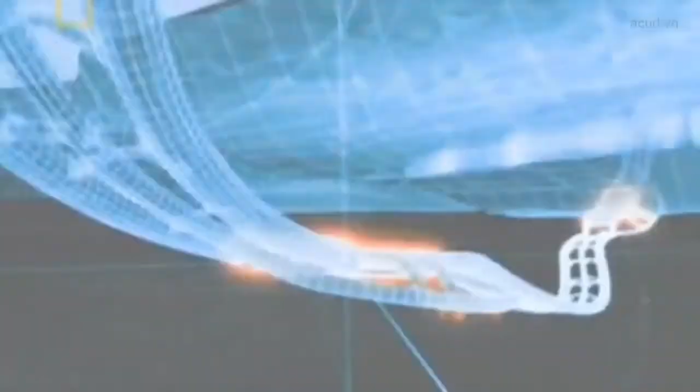Two countries divided by centuries of rivalry and warfare, and by 34 kilometers of treacherous open sea. It was a radical idea to dig a tunnel connecting them 100 meters below the rocky seabed. At stake, billions of pounds and the lives of 8,000 tunnellers. If it worked, it would be the world's longest undersea tunnel.

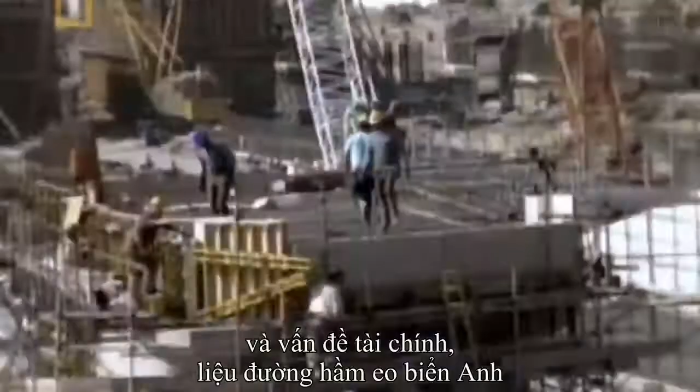But with terrifying floods, a horrific fire, and financial meltdown, the Channel Tunnel would dice with disaster right from the start. This train is making an extraordinary journey that will take it under the surface of the Earth, through one of the world's biggest man-made structures. Engineers call it one of the 7 wonders of the modern world. The Channel Tunnel took 7 years to construct and devoured 1 million tons of concrete, enough to build the Empire State Building 3 times over.

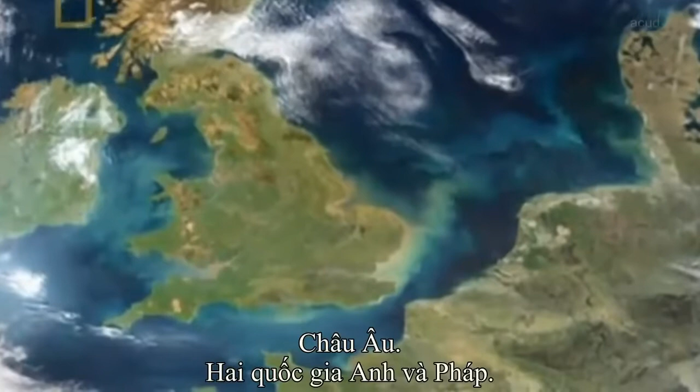Europe, the nations of Britain and France. Since Ice Age glaciers melted 13,000 years ago, they've been separated by this formidable body of water, the English Channel. At 34 kilometers across, it's twice as wide as the Grand Canyon. The two nations spent hundreds of years at war, right up to the last century. For many on both sides, it's still a love-hate relationship. So the idea of an undersea tunnel to link these one-time foes caused controversy. But the massive trade boost for both countries was an irresistible incentive.

In 1986, British Premier Thatcher and French President Mitterrand agreed to build the Channel Tunnel. But the total £3 billion budget was put up entirely by private finance. December 1987. The big dig begins. Heading underground were 2 armies of excavators, each over 4,000 strong, 1 French and 1 British. Each team would dig out from its own shoreline, racing to be the first to the midway point under the channel.

The Brits were a tunnelling elite drawn from major worldwide underground projects. Calling themselves the Tunnel Tigers, they set great store by teamwork. One-man armies don't go very far. You know, it takes quite a few lads to keep something like this going. Commanding them is Chief Engineer Gordon Crichton. You had a team who were totally dedicated to building the job.

The French digging team were the underdogs, locally recruited and trained up for the project. It's the first time any of us have done a job like this. Everyone's proud to be involved. Leading the French troops was Laurent Leblanc. I couldn't believe I was actually working on such an exciting and colossal project. For me, it was absolutely incredible.

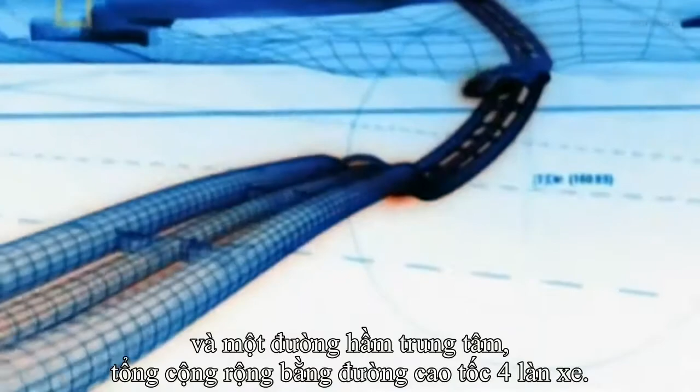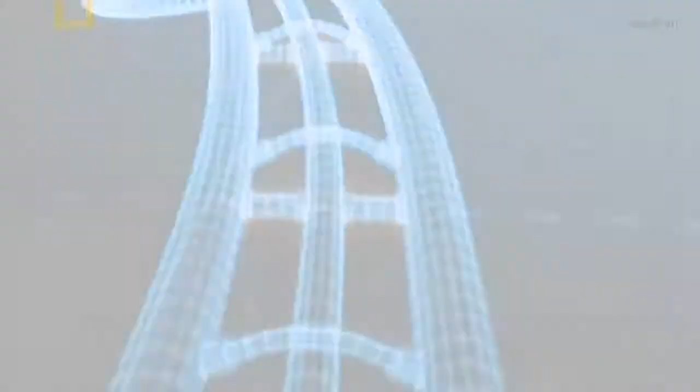The Channel Tunnel would run twice as long underwater as any previous tunnel. The task facing the teams was huge. They had to dig 2 main rail tunnels, plus a central service tunnel, together as wide as a 4-lane motorway. 245 cross passages, crucial escape routes in the nightmare scenario of a fire or accident in the tunnel. Above the tunnels, vents to release the huge air pressure from speeding trains. And giant crossover caverns, allowing trains to divert from one tunnel to the other to allow for maintenance. It all added up to a staggering 153 kilometers of tunnel to be dug.

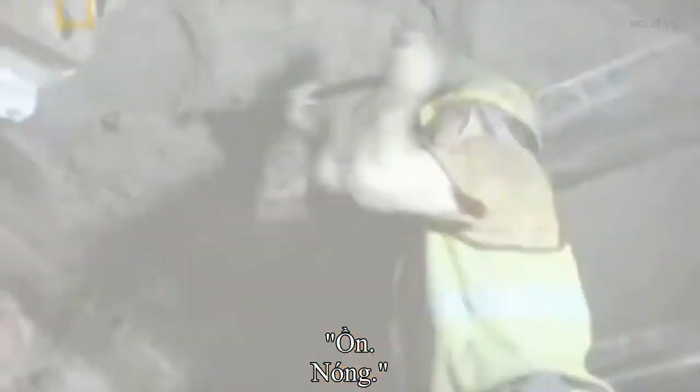As the dig began, the tunnellers were conscious of the vast scale and the real dangers of the task ahead. Above their heads, 100 metres of seawater and rocky seabed. Every day you wonder what you're going into. There's only one way in and one way out. Noisy, hot. You just think, what have I got myself in for, really? Ahead of these tunnelling foot soldiers stood a 17 million-ton wall of earth and rock. It's not a job for claustrophobics. The job would push the men to the limit, but it would also make big demands on the technology of the day.

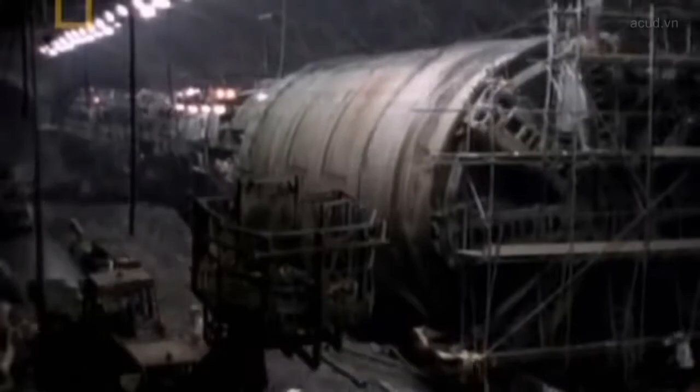Meet the tunnel boring machines. These underground leviathans spearheaded the Channel Tunnel dig. They were 200 metres long. That's the length of 2 football fields. They weighed 1,100 tonnes apiece, as much as a World War II destroyer. And they were twice as wide as a tank. Yet, as Gordon Crichton reveals, the way that TBMs work is surprisingly simple.

Imagine this is the bed of the channel. The machine is rotating underneath the sea, and as it rotates, the spoil from the tunnel is taken out the back, put into railway wagons and carried to the surface for disposal. Also, as it rotates, it erects a lining, a support round it, which is the permanent lining.

Expert tunneller Brendan Riley knew how central the TBMs were to the dig. Basically, the machine is a mini factory. The factory is provided with power, it's provided with water, it's provided with electric. It's a workshop of the machine, preventive repairs. Basically, it's self-contained. It's got everything. 11 French and British TBMs excavated the tunnels 24 hours a day, 7 days a week.

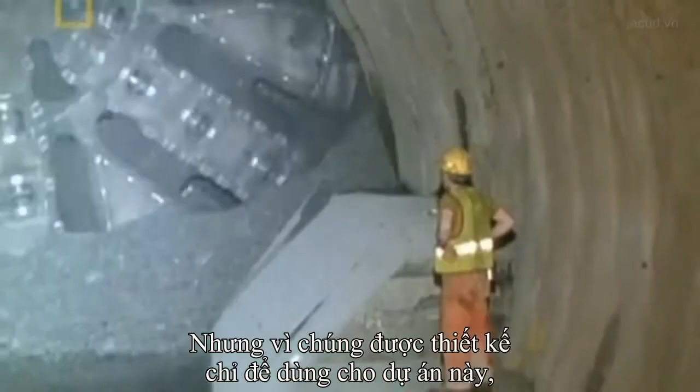The TBM's high-tensile forged steel blades carved out 10 tons of rock with every turn. The biggest machines cost £10 million each, but as they've been specially designed for this one job, at the end they would simply be scrapped.

The race between French and British tunnellers would be won or lost by their TBM's rate of progress. The Brits had the fastest machines, devouring up to 75 metres and 36,000 tonnes of rock a day. The French machines were 25% slower, but did have a key advantage. Their cutting heads were protected by a waterproof housing that allowed them to work on safely, even through waterlogged soil.

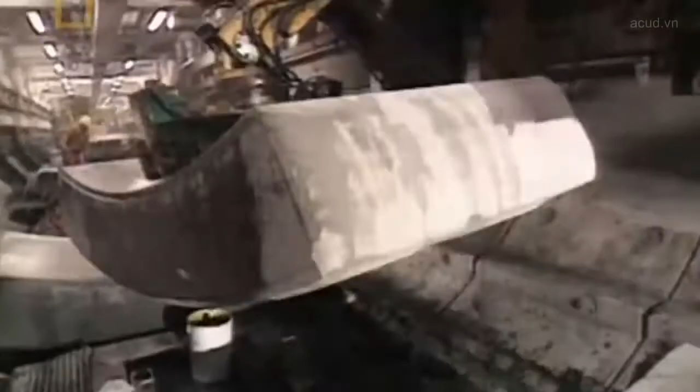1 month into the tunnel dig, with the ground staying dry, the speedier British TBMs began to get ahead. Every day, hundreds of concrete slabs were shipped in to line the tunnel roof as it was dug. They were as big as a family car and 3 times as heavy.

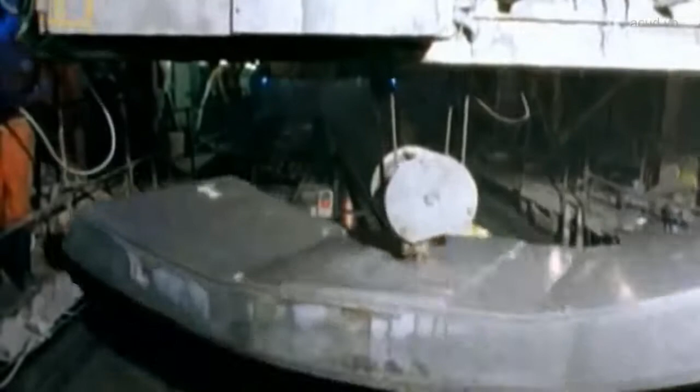This is no ordinary concrete. Specially made to a recipe using granite, it's stronger than the stuff they use to build nuclear reactors. The TBM's powerful hydraulic arms pushed the slabs into place, forming the tunnel wall.

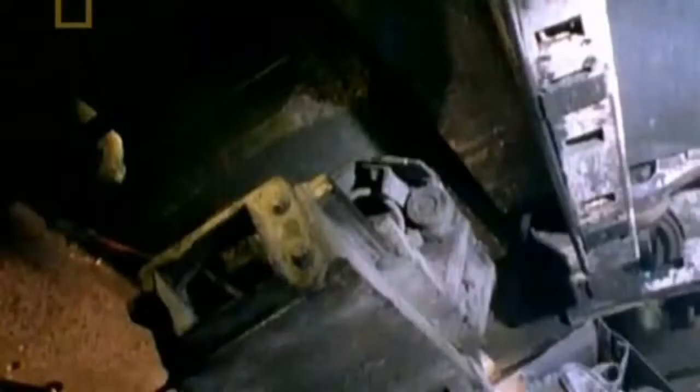The TBMs had to be kept supplied with slabs and constantly moving forward. British Chief Engineer Crichton knew that the schedule was tight. And with the tunnel's £1.3 billion budget all put up by private finance, government bailout was not an option. With the dig costing £1 million a day, each hour's overrun would add £40,000.

By January 1988, the Anglo-French tunnelling race was hotting up. But the Brits were holding on to their lead. The rivalry underground is keeping the dig on schedule, but speed isn't everything. Success relies on keeping both tunnels precisely on target. If they stray off course, lives could be at risk.

It's enough to daunt the boldest of engineers. The Channel Tunnel Project, the longest undersea tunnel in the world. Two rival teams of French and British workers were each digging out from their own shoreline. The plan, to meet midway under the English Channel.

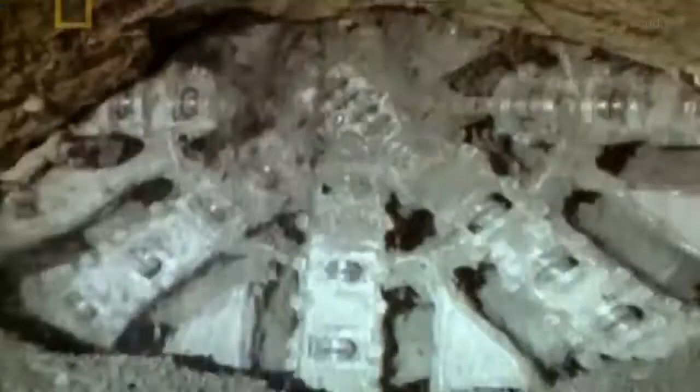The tunnellers' goal was to win the race for the midpoint. But what kept the engineers awake at night was much more fundamental. The fear that the two tunnels wouldn't meet up. If the two tunnels missed each other, that would mean last-minute course corrections, which could create sharp bends. And the high-speed trains that would use the tunnel had to have a broadly straight course to operate safely.

The margin for error was frighteningly slim. The tunnels could not deviate by more than 2.5 meters. Being off target was not an option. But lives were at stake too. If the massive tunnel-boring machines strayed off course, they could hit waterlogged ground. The result could be disastrous. Flooding, or worse, tunnel collapse.

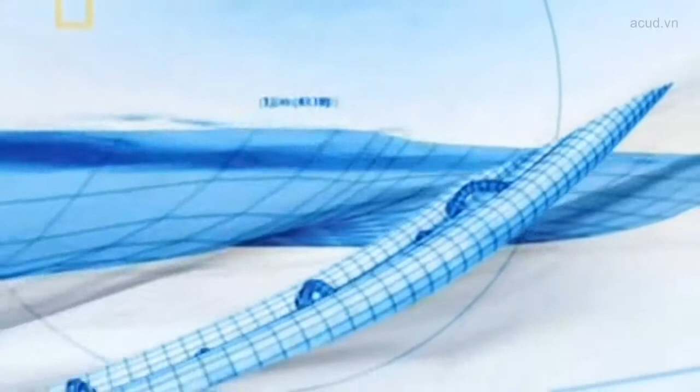It was imperative that the TBMs were guided along a safe and accurate route. That meant conducting one of the world's longest and most in-depth underground surveys. Rewind to August 1986, 18 months before tunnelling began.

When surveyor Ewart Gladstone took on the job of plotting the tunnel's course, he knew the scale of the challenge he faced. France you can see over there, that's the French coast. So we had all that way to drive the tunnel and keep it online for that 38 kilometres. Actually, from here it doesn't look too bad, but it's a long, long way.

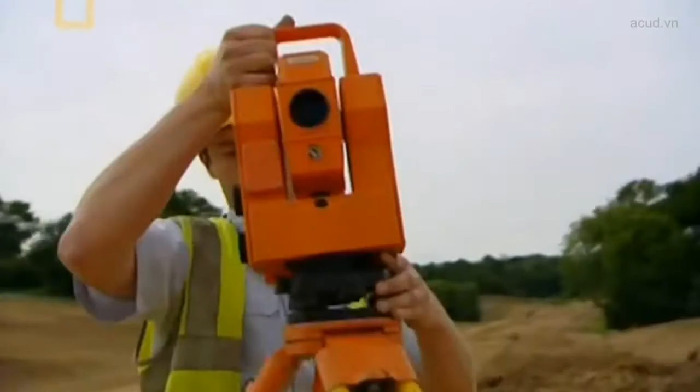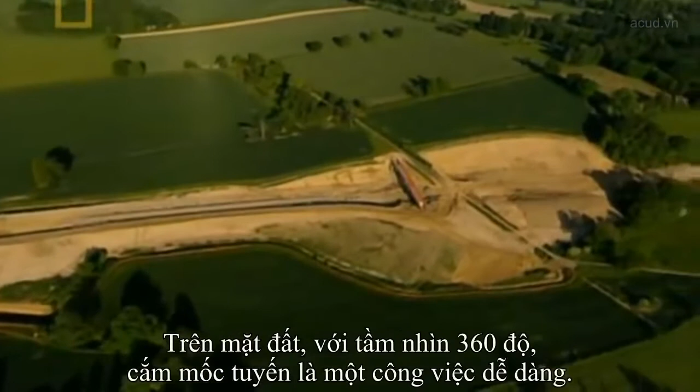Plotting an accurate course over such a long distance underground is a surveyor's nightmare. In tunnels, the normal rules of surveying don't apply. Surveyors normally work by measuring a series of angles at control points along the route. It's all a matter of geometry. Above ground, with 360-degree visibility, plotting a course is relatively simple.

Ewart Gladstone explains the difference. The whole road is opened to the air. All the survey control points from which you do the setting out are already established over the whole length. Underground, there are obvious complications. All the surveyors can see is a wall of rock. They can't see ahead to plot the course.

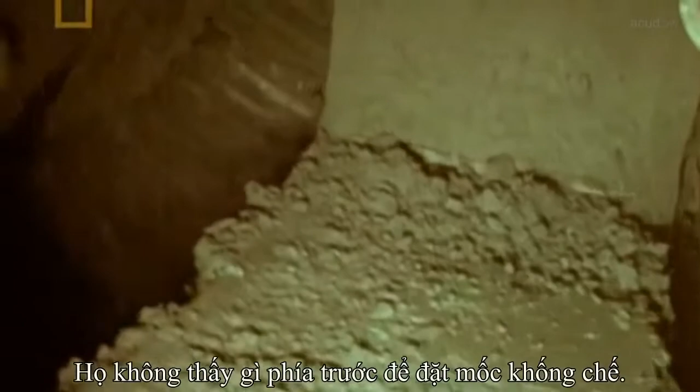Roads have one other plus point over tunnels. Because they're flat strips on the landscape, they can only go off course in two directions. Left or right.

A tunnel occupies a three-dimensional space underground. It can go off course not only left or right, but also up or down. The two halves of the Channel Tunnel had 4 potential ways to miss meeting up. It's like asking a golfer to sink a hole-in-one blindfolded from 38 kilometres.

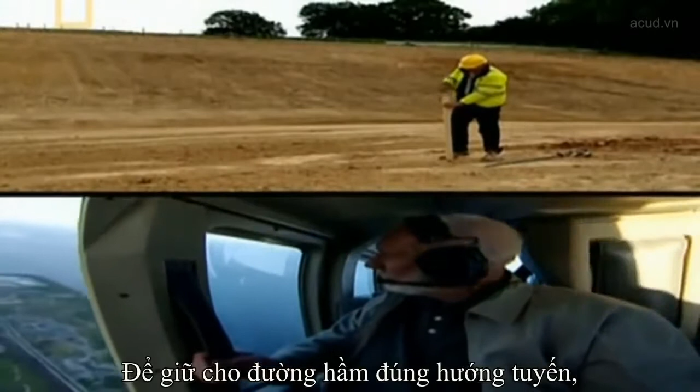To keep the tunnel on course and on target, the surveyors had to use a secret weapon: geology. Along its underground route, the tunnel would be driven through a layer cake of different soil and rock types with very different consistencies. The geologists needed one stratum that went right across the channel. This stratum would provide a trail to help keep the British and the French tunnellers on course. But it must be exactly the right type of rock for tunnelling.

Jean-Luc Desaines was one of the geophysicists charged with tracing the perfect stratum for the tunnel to follow. On the French side of the channel, Desaines began his search. It would have to be waterproof to resist flooding, and compact enough so it wouldn't collapse during the dig.

In these cliffs, Desaines found his prize. Water poured over this seam of rock without soaking in, evidence that it was waterproof. The soft rock, impervious, so no water in the tunnel. This is a perfect situation for boring a tunnel. It's called blue chalk.

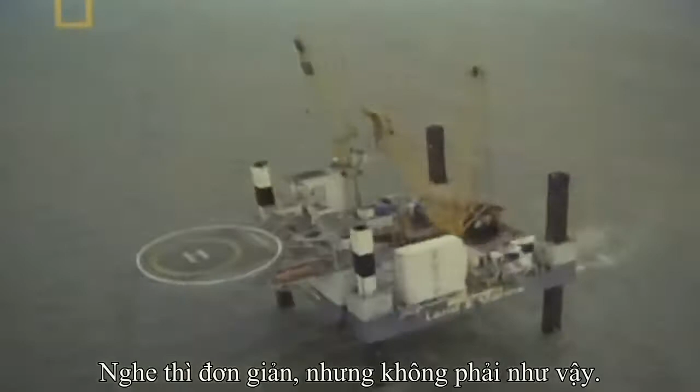But it was one thing to identify the ideal rock, another to discover its course. Geologists drilled a series of boreholes into the seabed and dropped probes that fired sound waves deep underground. The aim, to measure changes of speed in the sound waves as they passed through different rock and soil layers. It sounds straightforward, but it wasn't. Tracing the course of the blue chalk meant sinking 12 of these boreholes right across the channel, a tricky task in one of the world's busiest sea lanes.

You have a high traffic of vessels. You have tide, you have waves, so it's a difficult place for making accurate investigations.

The geologists concluded the blue chalk would provide a feasible route across the channel. If they were wrong and the TBMs left the waterproof strata, they could hit waterlogged ground, with devastating consequences, flooding or even tunnel collapse.

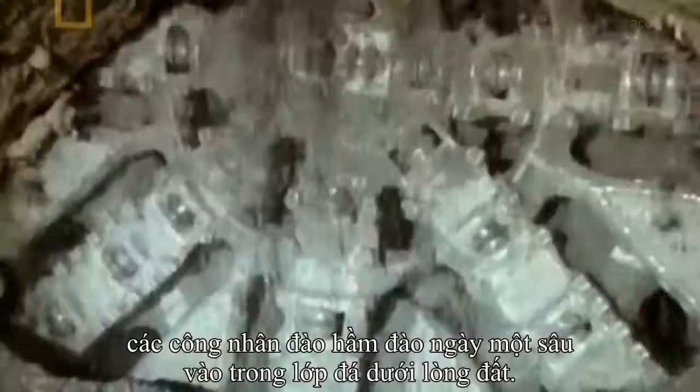Spring 1988, 3 months into the Channel Tunnel dig. The tunnellers were gouging their way through the rock deeper and deeper underground.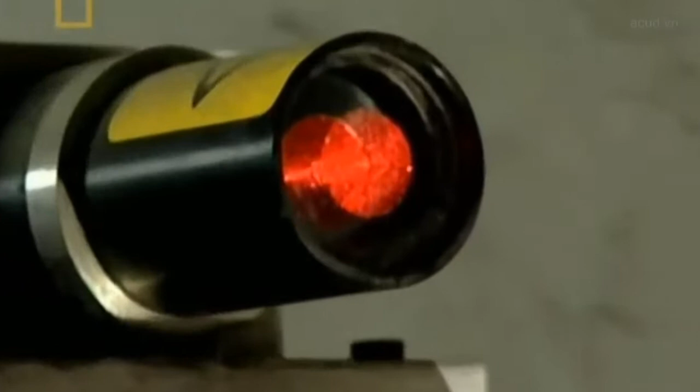Standing between the tunnellers and the risk of flood was the TBM's laser guidance system. Laser guidance is commonly used to keep above-ground structures like roads on course, but underground it had to be used in a more imaginative way. Instead of looking ahead to see where they were going, the tunnellers looked back to where they'd been.

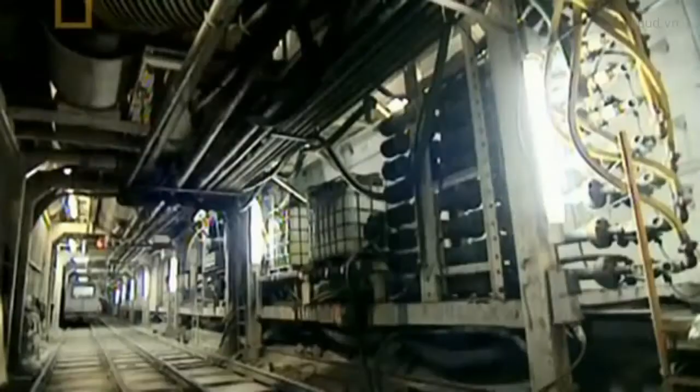Laser beams continually scanned backwards to the tunnel's start point to compare it with the TBM's changing location. Computers then checked this data against the surveyor's course coordinates. For tunneler Brendan Riley, the laser guidance system was one of the TBM's most impressive features.

As the machine moves forward, the laser monitors the change in movement to say whether the machine is moving left or right or up or down. With that information fed back into the computer, it compares that information to where the TBM should be at that known point in time, and gives that information back to the driver to say whether he needs to steer up or steer right.

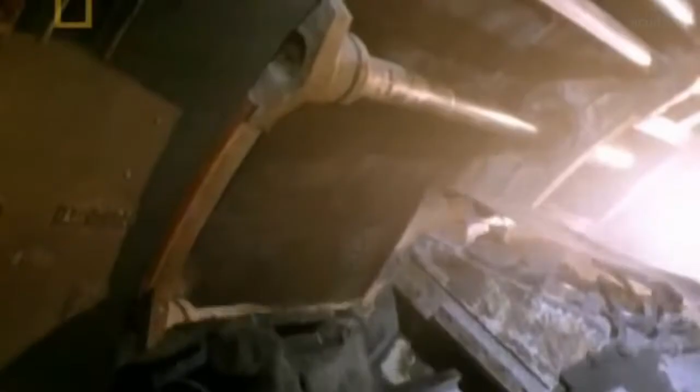As the tunnel face moved further from dry land, conditions for the men got worse. Engineering manager Ian Fugeman recalls the scene.

Anybody going to work had to travel in a cramped train up to 22 kilometres out to the place of work. By the end of the dig, the workers' trains had clocked up enough miles to go to the moon and back 4 times.

This far underground, keeping the air fresh is a major challenge. A massive ventilation system pumped air to the tunnel face. But the men still faced the risk of encountering toxic gases.

The further in you are, the warmer it gets, the less air. We carried respirators with us. If there was an accident, we'd have enough air to breathe with.

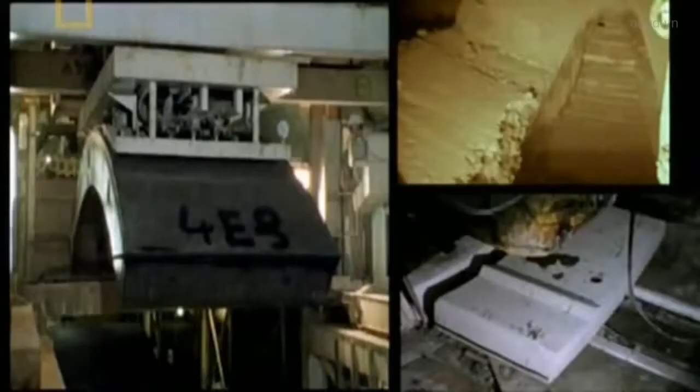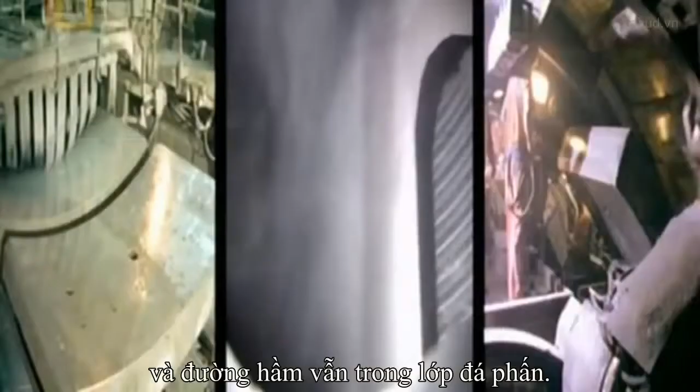But Chief Engineers Gordon Crichton and Laurent Leblanc, the frontline commanders of the tunnel dig, were starting to breathe easier. The schedule was holding up, and so was the layer of blue chalk. But what happened next came without warning.

March 1988, the service tunnel on the British side. Suddenly, what no undersea tunneler ever wants to see: water. Thousands of gallons of it flooding into the tunnel. Work comes to a halt.

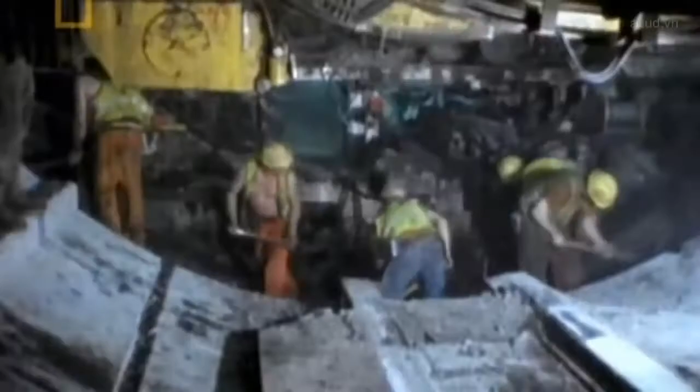Cause for panic. We have to stop straight away because you don't know exactly what you're going into. But Gordon Crichton must act fast to find out where the water is coming from.

Is this just a random pocket of fresh water, or is the sea itself breaking through? He tastes the water, and it's salty. We knew we had a path right to the channel itself. We knew it was serious. It's disastrous news. What's coming into the tunnel is seawater.

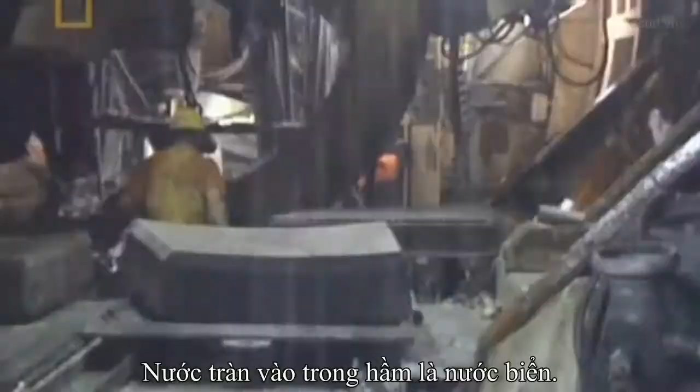The men know that above their heads there's 3,000 billion tons of it. The pressure on the seafloor 50 meters above is enough to crush a car like a beer can. Now, in places, the water starts to burst through with the force of a fire hose, 300 litres a minute.

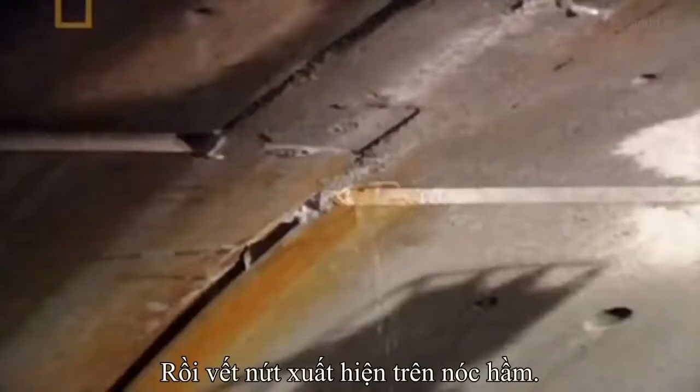Then a crack appears in the tunnel roof. Rocks start to fall. The water is pouring through fissures and loosening lumps of the tunnel roof. The British tunnellers might just be on the edge of disaster. If the cracks worsen, they might let in enough water to weaken the tunnel. Ultimately, it might even lead to the tunnellers' biggest fear: collapse. Chief Engineer Crichton must find a way to plug the leaks, or they could face catastrophe.

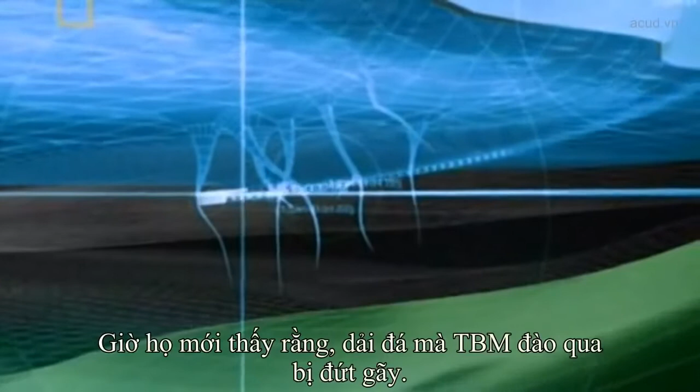But how could this be happening? An 18-month survey identified a special layer of rock called blue chalk that was meant to be waterproof. But geologists are quick to point out that surveys based on sound waves can reveal the course of a rock layer, but they can't give a definitive picture of the rock's quality. Now it turns out that the stratum of rock the tunnel is driving through is fractured, riddled with fault lines and cracks, something the surveyors could not have foreseen.

Back in the British tunnel, Engineer Crichton averts disaster. The men plug the leaks and concrete liners are replaced by stronger cast iron versions. Crisis over for now, the tunnel tigers start to inch forward again. But the fractured ground stretched on, and the atmosphere was edgy.

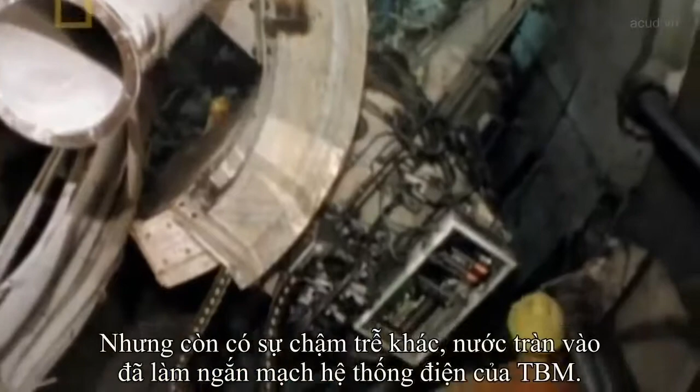Every ring that you cut, you were just hoping that it was going to be good ground that was there. But there were more delays as the leaks short-circuited the TBM's electrics. The clock was ticking. With every day, the costs were mounting, and the overspend was running into tens of millions.

The French side, meanwhile, had also hit water. We did indeed hit water. That made the job more difficult. A lot of water always makes the work harder.

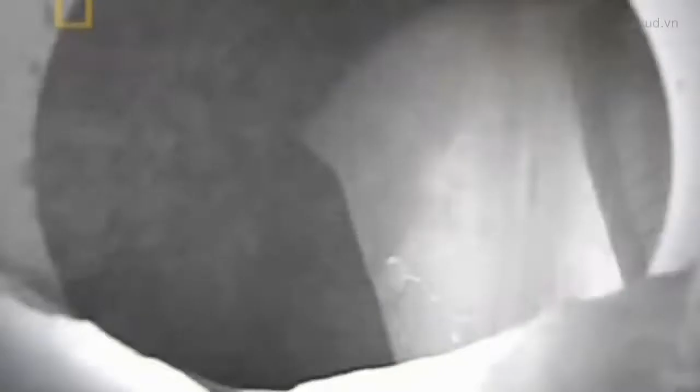But the French had been forewarned about fractured rock on their side. Features in the geology made it much simpler to analyse. Now the French decision to opt for waterproof tunnel boring machines finally started to pay off. Slower than the British TBMs so far, they now gave the French a serious edge. We decided to use tunnel boring machines that were totally enclosed, totally watertight. These could resist any level of water leakage, no matter how severe.

Meanwhile, the Brits slogged through the leaks and falling rocks and prayed for better ground. Workers rigged a form of makeshift armour plating on their TBM and pressed on.

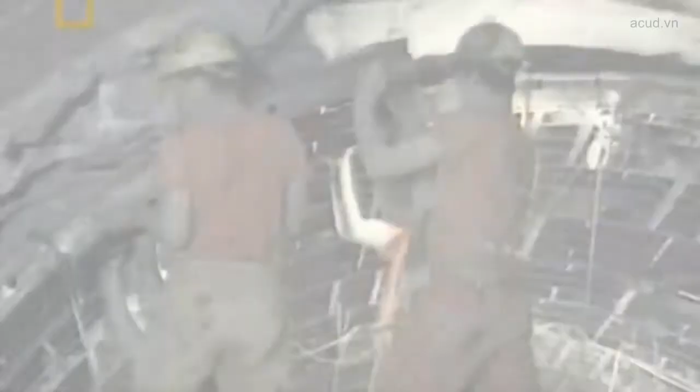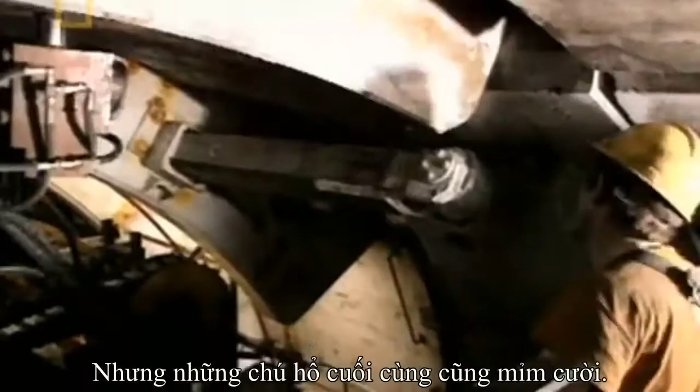January 1989. After a tortuous 9 months, the British team finally hit drier ground. Massively behind, the pressure to catch up was now intense. Everybody worked long hours. We had to do it to the time, we had to do it to the programme. But at last, the Tigers were smiling. The ground conditions come right, everything seemed to fall in place, and then we started taking off.

The British tunnellers fought their way back into the race. We've done over 400 metres quite a few times in a week, and I personally think we could have done the half kilometre. But success came with a sting. The British progress started to stretch the supply of lining slabs. If the slabs ran out, their dig would grind to a halt, with a multi-million-pound metre ticking.

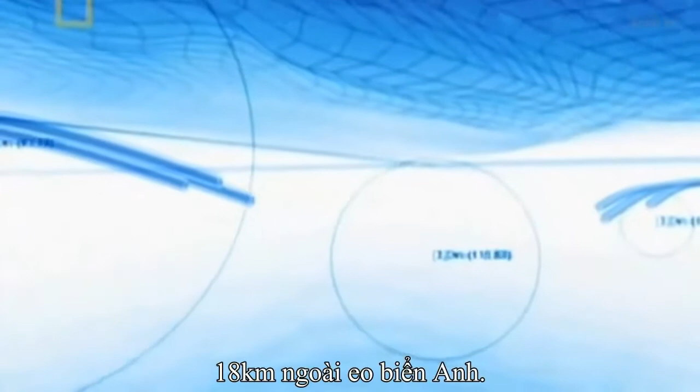January 1990. The French and British tunnelling teams were 2 years into digging the record-breaking Channel Tunnel. The competition between the two countries was fierce as they dug out from their coastlines. If all went to plan, the tunnels would meet up some 18 kilometres out, midway under the English Channel. Flood and rockfalls on the British side nearly spelt disaster and set progress back weeks. But now the Brits were catching up again, and the race for the halfway point was back on with a vengeance. But there's more to building a tunnel than high-speed digging.

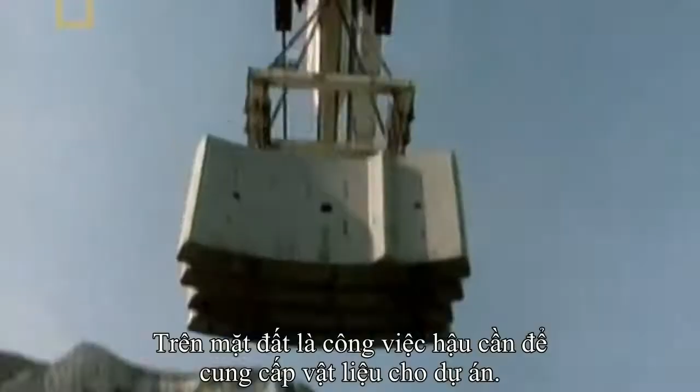Above ground, a huge round-the-clock operation kept the project fed with vital supplies, and the most crucial ingredient of all, concrete. Each slab weighs as much as a pickup truck. The French and the British together need 750,000 of them to line the tunnel.

In Britain, special trains carrying 4,500 tons of slabs, enough to construct 100 average houses, speed back and forth to the coast. But the British team was about to hit another problem.

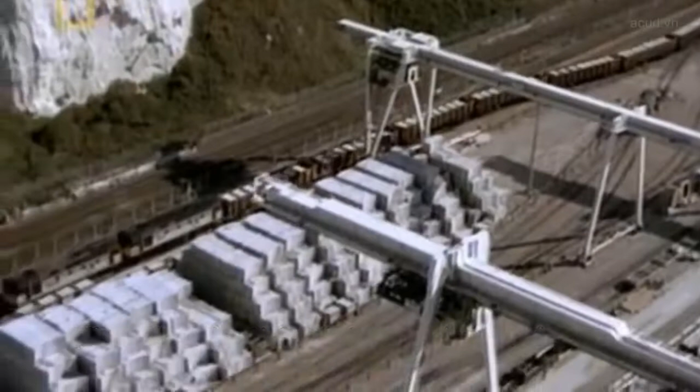The flat French shoreline provided plenty of room to store slabs close to their tunnel mouth, but 50-metre cliffs on the British side hugely restricted storage space. And as their tunnelling rate increased, space got tighter and tighter. If it ran out altogether, the supply chain would slow, the dig falter, and the mounting overspend could spin out of control.

The British TBMs were munching their way through the tunnel, but without slabs to line the roof, they would soon grind to an expensive halt. Luckily, somebody had a brainwave.

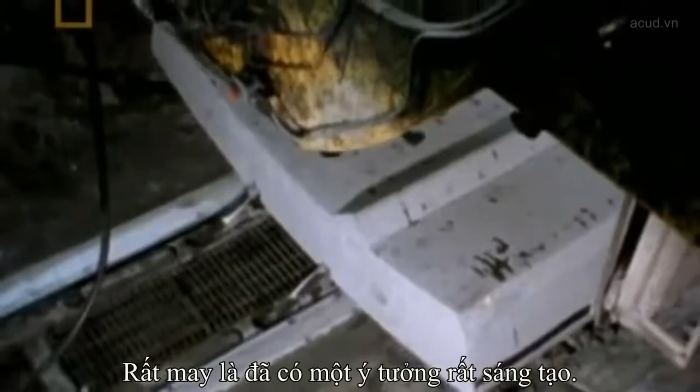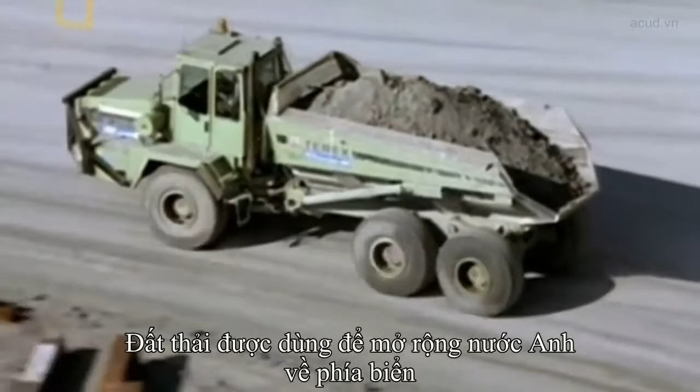Every day the TBMs produced up to 36,000 tons of unwanted rock and earth known as spoil. Why not use it to solve the storage problem? The spoil could be deployed to extend Britain's coastline out to sea, providing desperately needed space.

It was an audacious plan. 17 million tons of spoil, enough to fill over 2,000 Olympic swimming pools, were dumped into the sea. The storage problem was solved, and Britain grew by 90 acres. That's the area of 68 football pitches.

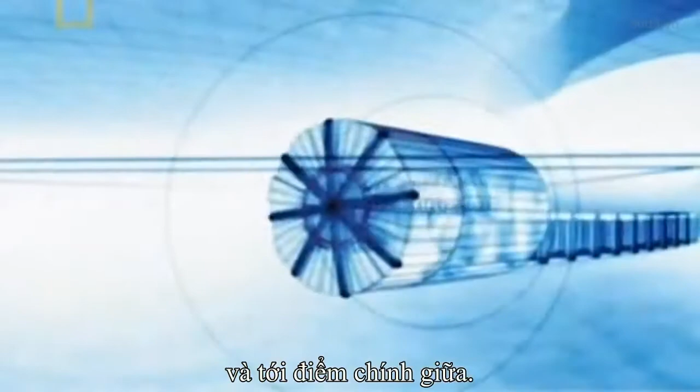Underground, the moment of truth was approaching as the French and British tunnellers edged ever closer together, towards breakthrough point. The tunnellers were intent on reaching the middle first. The engineers had bigger worries. After 3 years and 37 kilometres of tunnel dug, would the two halves actually meet in the middle?

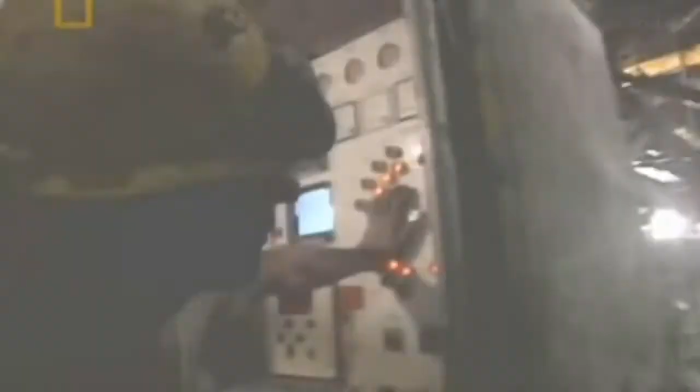The British reach what they think is the rendezvous point first, but are they anywhere near the French? As a small drill bites through the soil, a current of fresh air wafts through. Air from France. French and British workers raced to punch through the last few centimetres of rock that have separated the two nations since the Ice Age.

And then, an epoch-making moment. They're through! They're through! They're through!

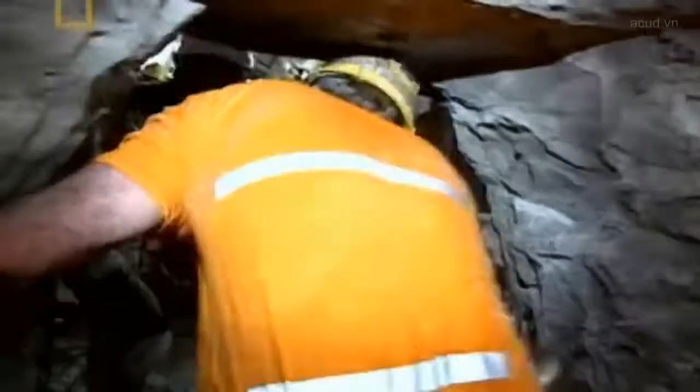It's British tunneler Graham Fagg who takes the first step into French territory and into the history books. To me, it's just fine for a day. I'm just an individual who was part of a team.

To see Graham making that connection and putting his head through the hole and disappearing into France, as it were, for the first time, that was fantastic.

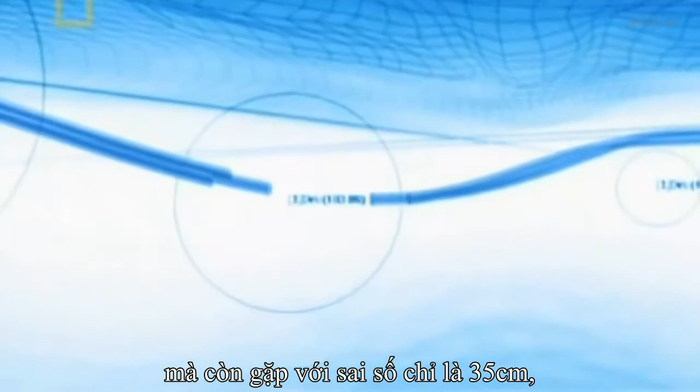For the first time in 13,000 years, Britain was reconnected to the European landmass. And the surveyors were vindicated. The tunnels didn't just meet, they met a minuscule 35 centimetres off target, the width of a portable TV screen.

No one had ever done it before, over 38 kilometres. From a surveyor's point of view, that is a unique achievement.

The tunnel tigers basked in their achievement. I think it's great. We're getting past halfway, so I suppose in a way we beat the French. So the British won the tunnelling race.

But if the French had got to the RV point first, there would have been a wait while the Brits scrambled to catch up.

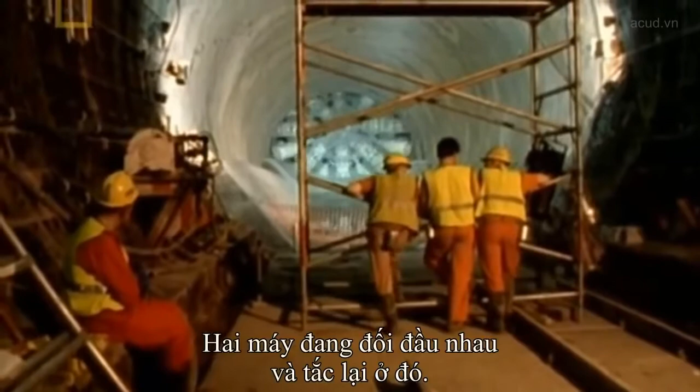Here's why. Job done, the TBM's only value was as scrap. But two machines were stuck head-to-head in a monster gridlock. One side's machine had to go. But what do you do with an 1,100-ton TBM that's past its use-by date?

Bury it. It was agreed that the British TBM would dive below its French counterpart to be entombed forever, 100 metres below the surface of the channel.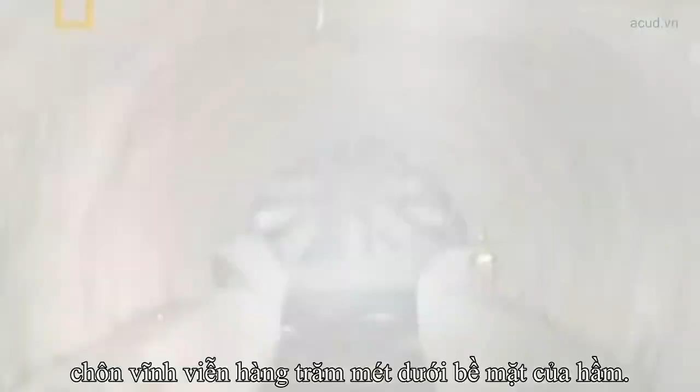As man and machine were parted after 3 years, it was a poignant moment for the tunnel tigers. You see the machines buried and you get a bit of a twinge, you know.

The French TBM was towed to Britain to be scrapped, so the Brits made the first breakthrough, but a French vehicle took the first trip under the channel.

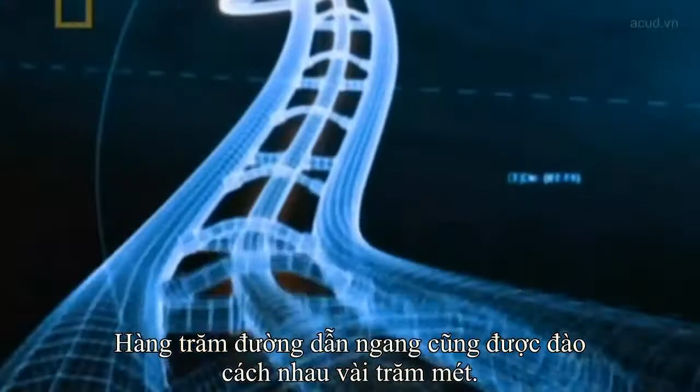Over the following months, the 4 other main tunnels met up in a flurry of breakthroughs. The tunnellers carved out hundreds of linking cross passages every few hundred metres. They drilled out the air pressure shafts. They finished off the crossover caverns. May 1991, the Channel Tunnel was finally dug.

The most important thing is that you can stand behind us and look straight through, and that's it.

For the French too, there was a tremendous sense of the significance of the moment. It's an historic moment. Napoleon tried to build a tunnel but failed. Now we have one Europe.

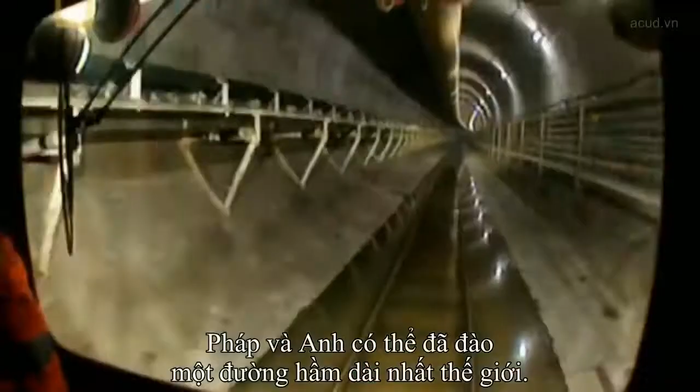But behind the scenes of celebration, there was one group who weren't quite so jubilant, the tunnel's financial backers. The French and British might have dug the world's longest undersea tunnel, but delays saw the budget soar from 1.3 billion to over £2 billion. And the job of building the international transport network serving the tunnel had only just begun.

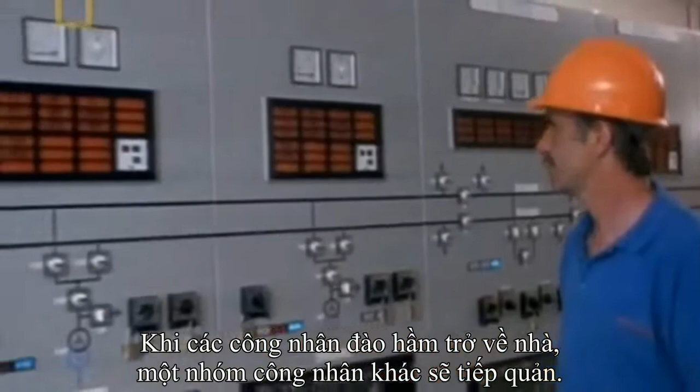As the tunnellers headed home, another army of workers took over. They would build 2 huge terminals on either side of the channel, lay 195 kilometres of railway track, and to extract the heat generated by high-speed trains, fit a giant cooling system equal to 250,000 domestic fridges. They would also build new trains designed to carry cars, trucks and people through the tunnel.

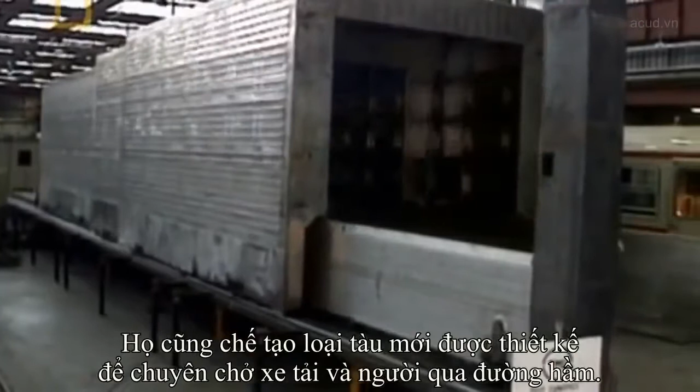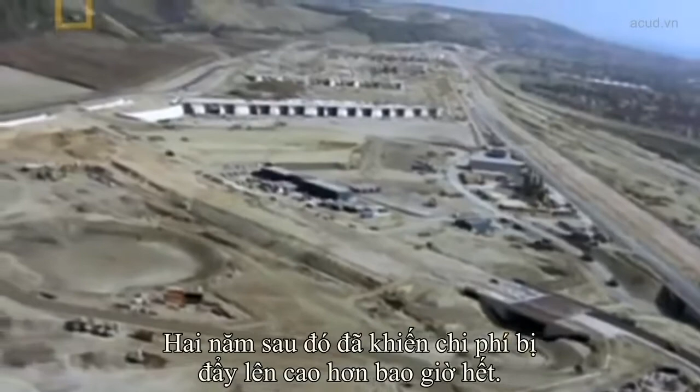But if the tunnel's investors had any hopes that Phase 2 of the project would come in on time or budget, they were in for a big disappointment. 2 years later, overruns had driven the spend higher than ever. The terminals, the track, the trains, they all bust the budget. May the 6th, 1994, the Queen and French President Mitterrand opened the Channel Tunnel. A year late.

Delays and interest charges had racked the total cost up to £10 billion, enough to launch 33 space shuttles. Financial institutions of many countries collaborated to finance this, the biggest privately funded construction project ever undertaken. But business wasn't booming. At first, the tunnel trains could only take trucks. It was 6 months before the tunnel could handle cars and passengers.

A cross-channel trip by ferry from Britain to France takes an hour and a quarter. Using the tunnel slashed the journey to just 35 minutes. But take-up was low. Some speculated that people were fearful of being underground if there should be a disaster. Meanwhile, high interest rates and massive competition from ferries and airlines dragged the tunnel even deeper into debt. And then, just when things seemed at rock bottom, everyone's worst fears were realized.

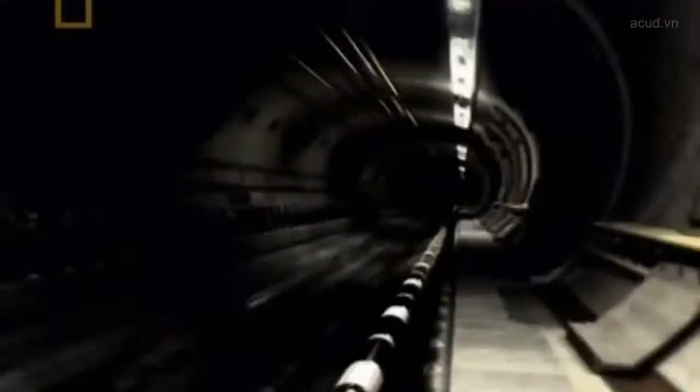One of the 31 passengers on board is British truck driver Brian Shilton. And all of a sudden we started to see this black, jet black smoke rising, coming in from the floor of the carriage. The truck drivers are riding in a passenger coach behind the engine. The fire starts 400 metres away, but it's getting closer.

Bill Welsh of the Kent Fire Brigade will later that night find himself face to face with the Channel Tunnel fire. We were talking about the most severe fire you can ever imagine. It really was like looking into a furnace, if you can imagine what that's like. Welsh's first concern, how to rescue the passengers. There's no way out. It's not like you're in a house, you can get out the doors, the windows. When you're in a tunnel, you're relying on someone coming to rescue you.

At 9:51 p.m, the Fire Control Centre advises the driver to keep going. Speed helps suppress the flames, and the train is only 15 minutes from the other side. US fire expert Ed Comeau will later help British and French investigators sift through the charred wreckage of the train. Part of the standard operating procedures is to allow the train to continue through and emerge on the other side where they would fight the fire and suppress it. The train accelerates deeper into the tunnel, racing for the English coast.

At 9:57, the crisis takes a horrifying turn. A dashboard light warns the driver that a wagon fitting has come loose. The train must stop or risk derailment. As the train comes to a halt, the fire erupts. It quickly burns through the train's power supply. The lights went in darkness. It was just like something out of hell. Within 3 minutes of the power loss, toxic black smoke engulfs the train. We was lying on the floor, all choking. 1 or 2 drivers started to vomit.

The train is 19 kilometres into the tunnel, but safety lies just a few metres away in the service tunnel. To reach it, the passengers must find one of the cross passages in the main tunnel walls. But the smoke is too thick to see the way out. The driver and the crew could not see where the door was. They couldn't see the safety lights. So they were stuck there. They were waiting for someone to come and open that door and help them.

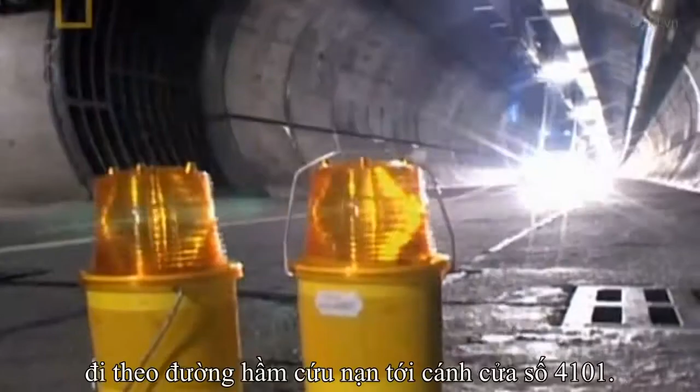10:02 p.m. Using fire sensors, controllers identify a hot spot in the main tunnel that they think must be the train. They open the nearest cross-passage door remotely. The controllers now direct French firefighters into the central service tunnel to cross-passage door number 4101. It's the one they think is nearest to the passenger coach.

It's a 15-minute journey, and for the stranded passengers, time is running out. In the tunnel, trucks are now exploding. Tyres on the lorries all blowing. The train was just rocking from side to side on the track, and that was actually happening while we was lying on the floor.

The temperature climbs. At its peak, it will reach 1,000 degrees centigrade. So hot, the train's steel wheels are welded to the rails, and the concrete lining of the tunnel itself becomes dangerously unstable. It's where the moisture within the concrete expands and then explodes out with terrific force. Very much, I would imagine, like shrapnel in a war situation.

10:20 p.m. Firefighters arrive at cross-passage door 4101. But to their horror, there's no train. It's the wrong door. The chances of saving the passengers are receding fast.

Fire is raging through a train halted 19 kilometres into the Channel Tunnel. In choking smoke, 31 passengers await rescue. The flames are just 200 metres away and closing fast. But firefighters have gone to the wrong section of the tunnel. Aboard the train, the conductor spots a bubble of clean air through the smoke. There must be an open escape route nearby. It's their only chance. The passengers must leave the carriage and plunge into the inferno.

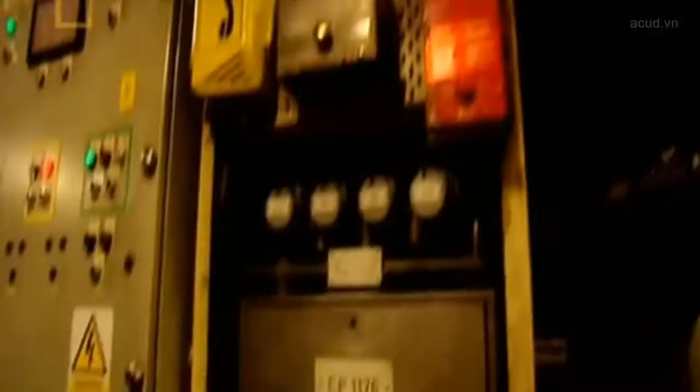After the fire, an urgent safety review. It results in improved fire sensors, better emergency lighting, and promises a quicker future response from firefighters. The tunnel was repaired and reopened in just 2 weeks, but the damage to its image would take longer to overcome.

1999, the last year of the century, the last year of the millennium. At last, a good year for the Channel Tunnel. More than 5 million cars and trucks travelled on the underground rail link between the British and French coasts. Nearly 7 million people use the passenger service that links London, Paris and the Belgian capital, Brussels. 10 years on, and nearly 150 million people have travelled through the tunnel. That's more than twice the UK's population.

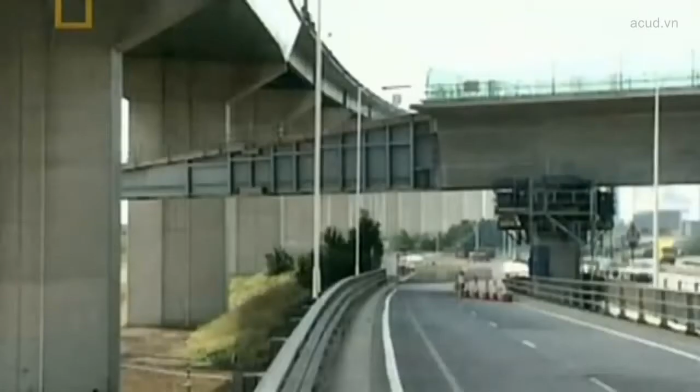Now, Britain and France are to be brought even closer via a new high-speed rail link from London to the tunnel entrance. Trains reaching 300 kilometres per hour will speed passengers to Paris in 2 hours 15 minutes, half the journey time of the pre-tunnel era. So far, the line's on budget and on schedule. It will complete a vast pan-European transport network. At its heart, the Channel Tunnel itself.

11 men lost their lives while building the Channel Tunnel. For British Chief Engineer Gordon Crichton, the tunnel stands as a permanent testament to them and to all those who built it. People were proud to work on it, and I really think that's what saw it through at the end. For Crichton's opposite number, Laurent Leblanc, the tunnel represents a personal best. For me, it's a great memory, the experience of my life without a doubt.

An undersea tunnel to unite two nations with such an ambivalent relationship seemed an eccentric plan. But the Channel Tunnel has overcome scepticism, grappled with a debt mountain, and endured fire and flood. It's become one of the engineering wonders of the modern world and changed the shape of Europe forever.